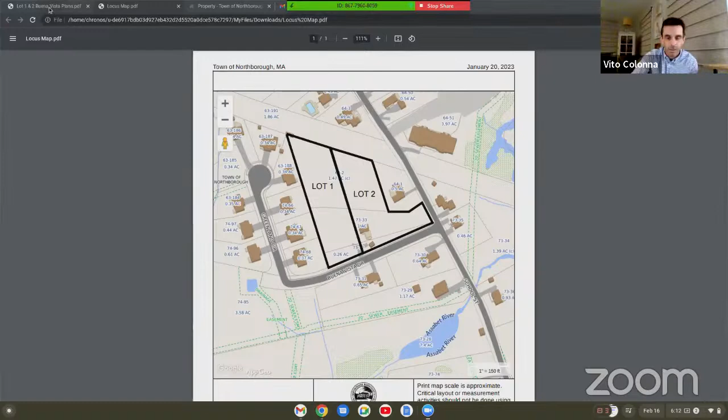Switch over to the site plan. So this is rotated from the last view just so we could fit it on one sheet. But essentially, like I said, it's about a 2.7 acre parcel. Just the front part is developed with that existing house.

We also have wetlands down here right along Buena Vista, right here on this side. And there's also a wetland across the street down in here. Those are delineated by Goddard Consulting last year, last fall. And we located those by survey. So those are both regulated wetlands. This one over here eventually drains into the street drainage system.

There's a culvert right here. So this wetland eventually goes into the street drainage system, across the road into a drainage ditch, and then it goes under School Street and eventually makes its way after a while down to the Assabet River. So both of these are BVWs. The 100-foot buffer zone extends up here and over in here.

The existing site, so just as far as regulatory, I forgot to go over that, regulatory requirements. So each lot, the disturbance is less than 1 acre, but combined, since it's one developer, so it's one common land, the total disturbance was over 1 acre. So that's what triggered the land disturbance permit. If looked at individually, the land disturbance permit wouldn't be required. Combined, they are over that acre.

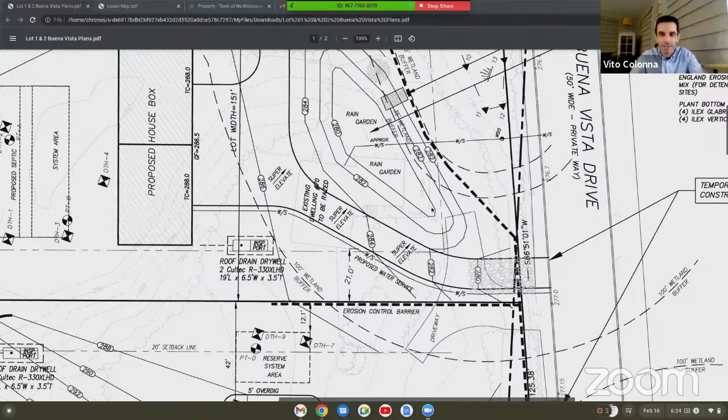So the existing limit of clearing right now kind of runs right through here, kind of right up, follow my cursor. It's tough to see the tree line on this plan, but it's right through there.

Any other questions?

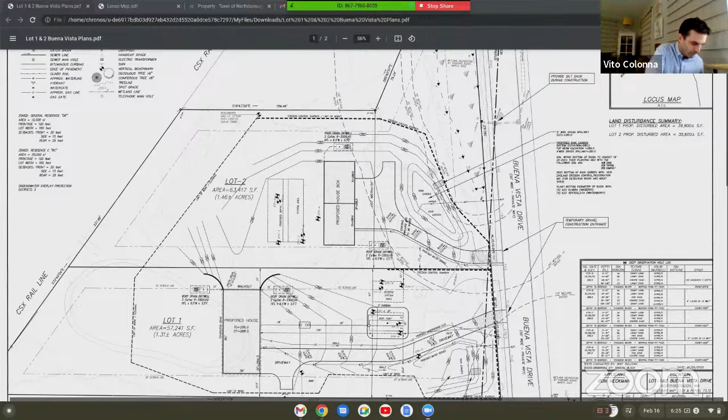Vinny, we were out there walking - I'm not Vinny, Vito - yep. The limit of work here for lot 1 on the southern side, the property line, is there a ridge, is it along the ridge, the property line, or where is that exactly? Yeah, the ridge is essentially where the property line is, it kind of coincides with that limit of clearing. Right now the tree line runs right here, then comes out a little bit, but it generally runs the property line, is where that limit is, the tree line.

Let's see, if there's no other questions from the commission, let me see what we have here in public. We have a bunch of folks here. Anybody, if you want to speak, please get your hand up through the Zoom pieces.

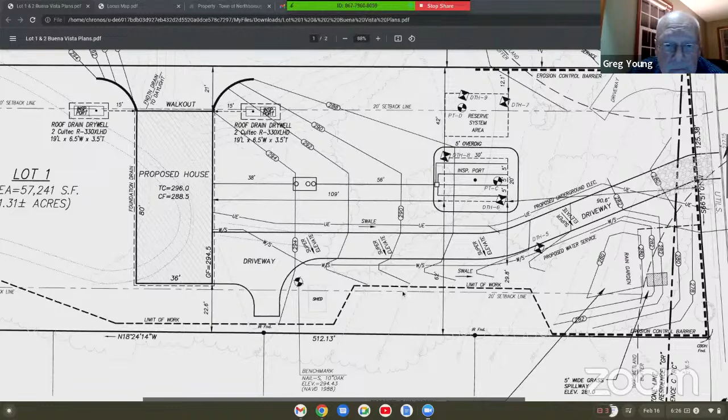Okay, I see a hand up. Marie Ann, hope I pronounced it correctly, Faisler. I will bring you in as a panelist.

Yes, there you are, you're muted. Hi, how do you pronounce your last name? Feisler, okay. I didn't do it too badly. I didn't want to be the first one, I was hoping somebody else would talk first.

So we live at 26 Greenland Circle, which is at the end. Everybody is looking at the lot line, the limit of work line, and the tree line. There was a concern of one homeowner having his tree cut because the limit of work was outside the tree line on this plan.

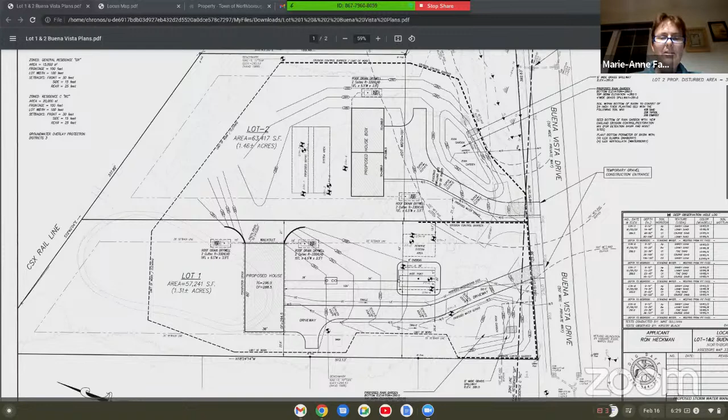Are you referring to one of the notes I read, from Tom Estelle? He has like 5 trees specifically he was hoping to keep. Is that who you're referring to? Yeah, I was referring just in general, because that seems to be a discrepancy between the reality of where the lot line is on the ground and the map. I think other people may wonder, are there other discrepancies?

Vito, this has been surveyed, I presume, right? Yeah, we surveyed this, and it was actually very well documented, this subdivision, when it was built, the records are really good, and we found monuments all over the place. So we're very confident in the lines that are shown. We found monuments right along this rear line, right along the rail line, all along the street, and they all match up with all the deeds and plans of record. So the lot lines shown, we're extremely confident where they are.

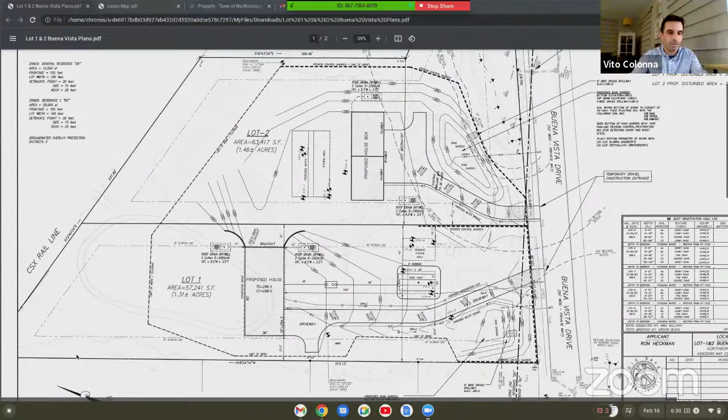So then those trees will be cut? I'm just not sure exactly which trees are being referred to. There are some spots where some of the abutters, like in this lot corner down here, cleared over the first lot in the corner - if you can enlarge it, down in this one. No, the left, the right, no, the other, towards Buena Vista, right, this one down.

Whoops, sorry, that's not where the wetlands are. Okay, this one right here. Yeah, if you can enlarge that.

Yeah, so the property line here basically coincides with that tree line right now. But if you go towards the corner - I can't point with my cursor - if you take a turn there by the corner, you see that tree line is clearly inside. Yep, up in here. Yeah, so that's on the applicant's property.

Yes, so the homeowner was told his tree will be okay. Okay, well, I'm not sure which tree, but to help them out, there's a concrete bound - what does it look like, 15 feet off the pavement? Your pointer's right at it. That's a concrete bound that should be visible, and that marks the corner.

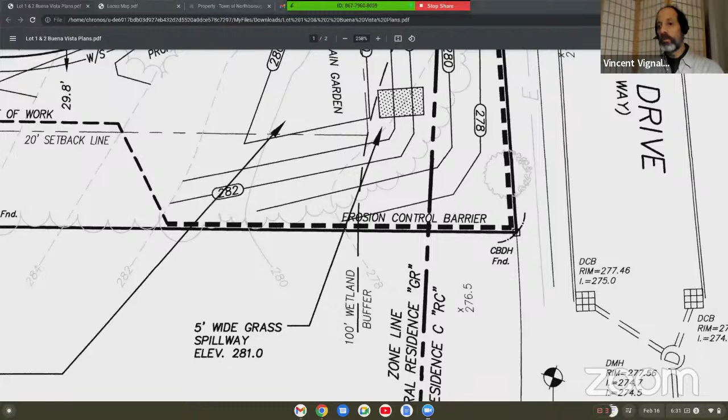So if the homeowner goes out and looks at that concrete bound, it's pretty much perpendicular to Buena Vista Drive - that's the property line right off that bound. So there's a marker out there, and then you can confirm whether the tree is in or out.

It looks like the tree line is inside. Yeah, and the tree line may be off by a few feet, but if you actually go out there and look, you'll know yes or no.

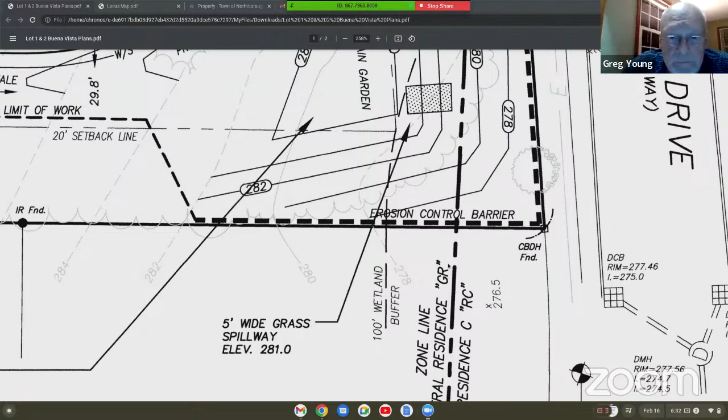But it looks to me like everything above - and I think that's to the north, assuming, oh no, I guess that's east - on the upper portion of this picture, everything up there is going to be cut. So if it's on the proponent's property, on the lot 1 property, the tree is going to be cut.

And there were some other trees down in this location that we didn't locate because they were off site. But there are other trees that are on the abutter's property also down in here. They weren't part of the tree line, they were freestanding, so they're not part of that, but there are other trees down in here.

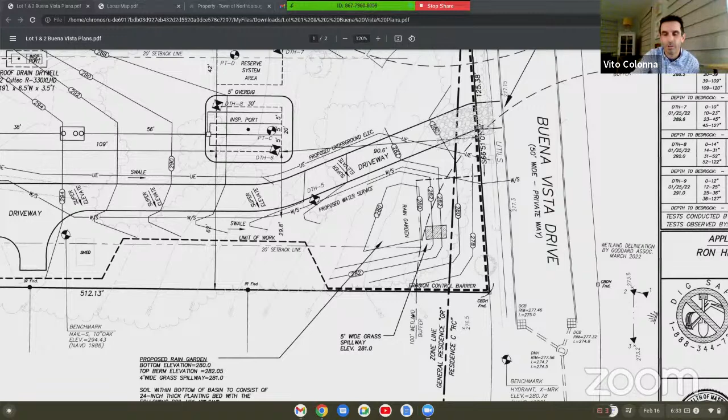Rather than trying to go back and forth talking, we can just locate them and show them on the plan, or just show that we can protect them. But when we get to it, before any trees are cut, I would ribbon them all, and then anyone that wants to take a look and say, oh my God, I can't live with that tree being cut, then we can address that at that point.

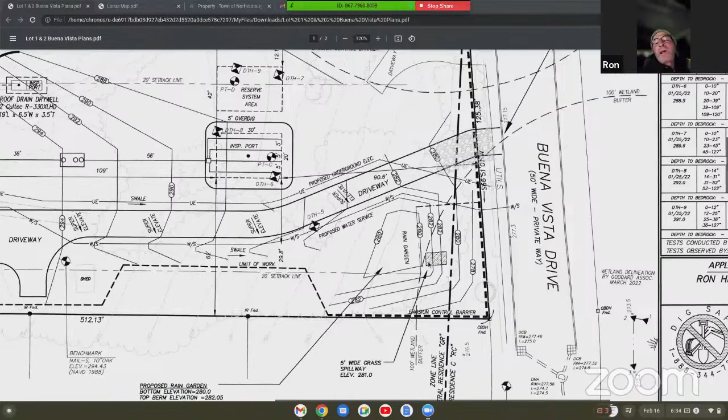But believe me, I want to leave trees as much, if not more, than anyone else here, because I love trees, period, end of story. My intention is to disturb the land as little as possible. I'm gonna live there. I want as much buffer from everyone else, and I want everybody to be buffered from me. And I'm just gonna do the right thing.

Whatever it takes. Ron, that was one of the questions I was going to ask next. You kind of answered it, which is great. And that was, is it possible to leave a reasonable barrier along that ridge separating lot 1 from those homes? It sounds like the answer there is yes.

Absolutely, except for right where we have to excavate for the foundation, okay? That area right there, any trees that are on our property are gonna have to go. But whatever, I'm gonna replace them. It'll be smaller trees, but I'm gonna create some type of a vegetated buffer zone right there.

You can see where the house is gonna go, that end of the house, okay? Because it's so tight to the lot line, we'll probably have to take most of the trees there just to get the foundation in. But we're gonna replace them with some type of a vegetated buffer zone, which to me will probably be as attractive, if not more attractive, than what's there right now.

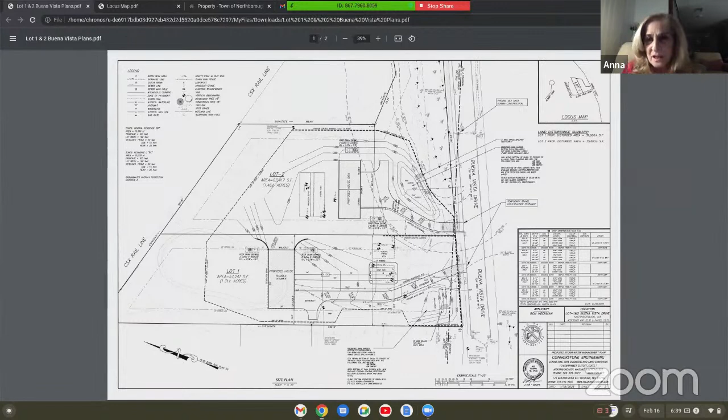I'm presuming that those questions and concerns have been seen by the other members. Yes, he sent those out to all of us during the package for today. Okay, great. So I have a couple of additional questions.

Now, we have been talking about those trees and stuff. Is there any chance that Ron or somebody could maybe make an arrangement with the 3 or 4 houses along there and give us an idea of where it actually will be on our specific property? Like, I'd like to visualize where it is, I'm at 10 Greenland Circle.

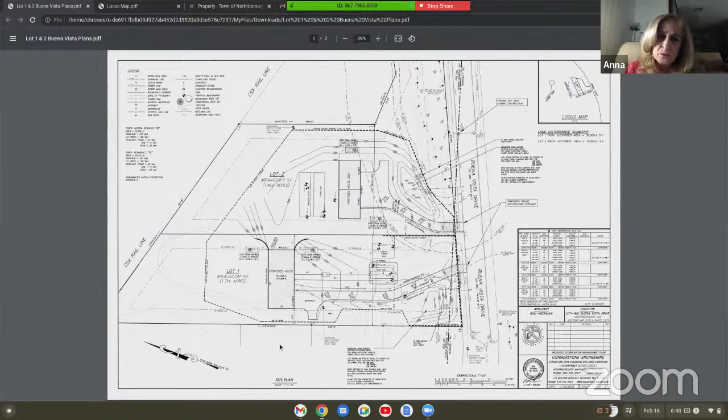Right there, yeah. And also, do you notice that exactly where 10 is separated from 14 and 16, the driveway abuts a little bit further, closer into our property? What's the reason for that? It's just a turnout, so when you pull out of the garage and back out, you can turn around to get out. Oh, okay, okay.

Again, my biggest concern, and it sounds like everyone has taken that into consideration, is the fact that we're all much lower than the proposed home. It seems like you've done a lot of work deciding where the water will be. So my biggest concern is water runoff and the water table in our area, because on Buena Vista Drive, even on a dry day, there's always a puddle of water. So I'm concerned about that coming into our driveways and homes. I know you talked about it, but I'm a layperson and don't understand — has that been taken into consideration so we don't need to be concerned?

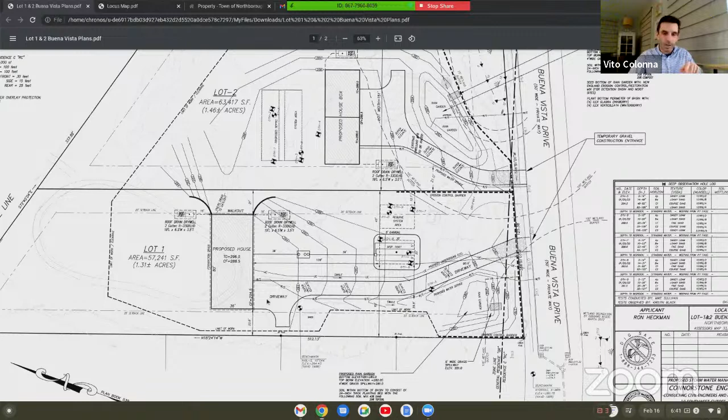Right, so the intent would be to have everything grade or drain away from these properties, all of them down here, especially the ones up by the house. We wouldn't grade this in a way that would direct any runoff towards these houses down here.

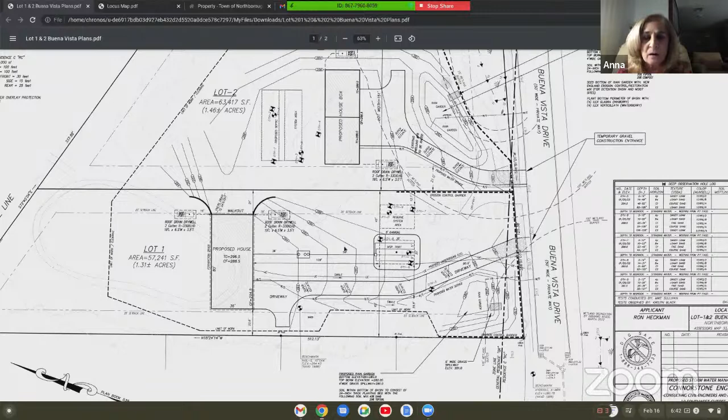And is there any reason that, to get anything to the proposed house, anything would need to go through our land? Gas lines or utilities of some sort going through our land? No, everything — all the utilities are available out on the frontage down in Buena Vista. So nothing would impact or cross any of the property lines. Water and electricity are both out in the street.

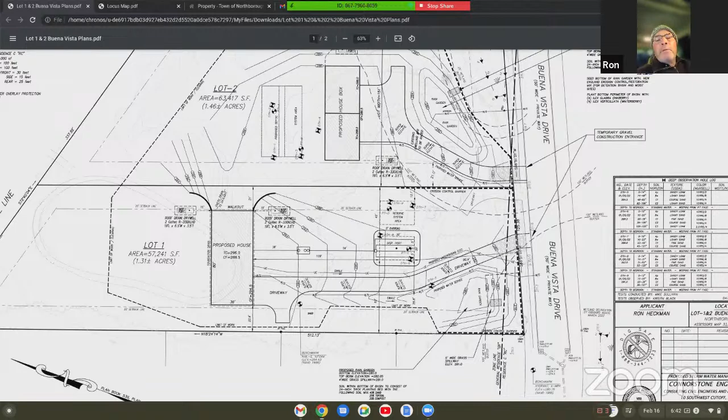Okay, thank you. I don't know if you were on earlier, but Mr. Heckman did say he was willing to flag some of the trees along that property edge once we get further along, to get an idea of what's going to stay. Oh, that'd be great, thank you. Yes, we'll flag all the trees before, and then I can talk to any of the abutters. Like I said, I'm going to do the best I can to save as many trees as possible — I'd rather not cut any trees if I can.

You all set? Yes, all set. Thank you. Any other hands up? I don't see any more hands. One more look here. No more hands. Okay, we can double check before we're done.

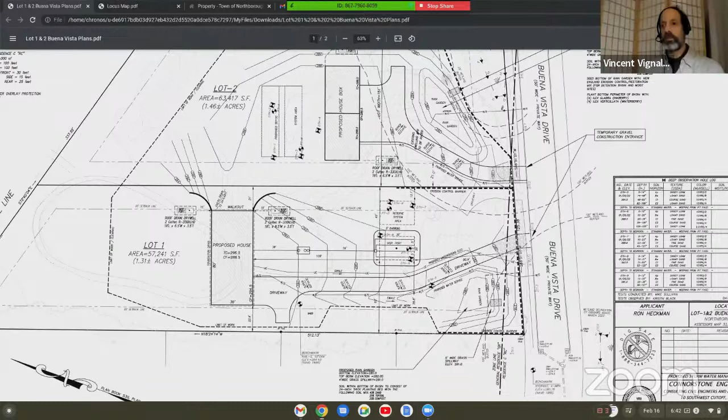Okay Vinny, any questions you have? I know you're working with Vito — would you say he's answered half of your questions or less than half, more than half? Well, right now he's putting together plans to address all of them, so I'm just waiting to see what the plans show. Nothing's insurmountable, I think it's just a matter of tweaking it and making it work for the priorities in the land disturbance permit.

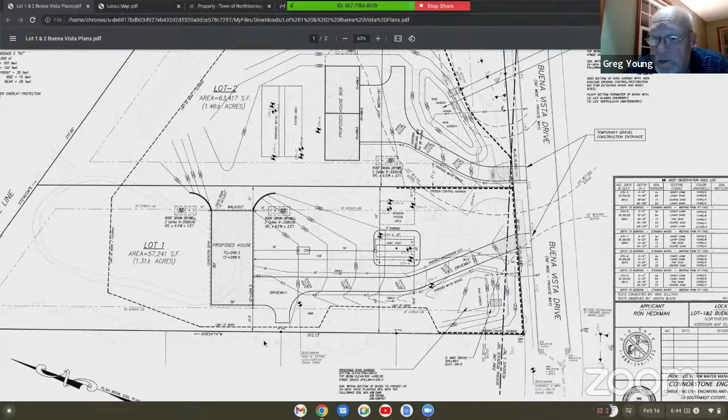Mr. Heckman certainly seems willing to minimize any disturbances and try to provide some support for the abutters, which is good to hear. Any more commission questions? Oh, I've got a hand up — no more, Todd saying no. Dan, you're good. Nope, also Tom Beals, good. Okay, let me bring Mr. Gleason in here — promote to panelist. Brian Gleason will be joining us.

Any minute now. Mr. Gleason, you with us? No. His name is coming up, but he's muted. There he is. Can you hear me now?

We can hear you, Mr. Gleason. Yes, sir. Okay, first of all, I just want to thank you for hearing our concerns. I'm at 22 Greenland Circle, which is next to Marianne. I bought my home in 1999, so I've been there a long time. And I like my privacy. So I'm concerned with the barrier. I want to make sure I don't have to look up from my backyard and see little kids on the swing set on the home across the way there.

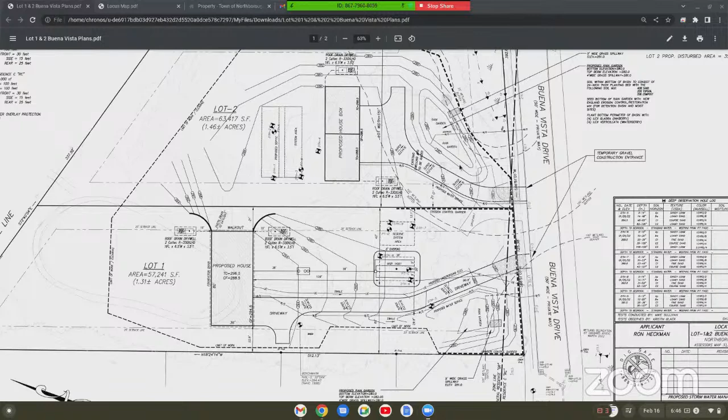So whatever you guys can do to provide some additional privacy, that would be great. And hoping maybe somebody can come out and walk with us along that barrier and just show us, because we're not quite sure. I have chairs out there, and I sit at the top of the hill, and I don't know if the hill's going to go away. So I'm just curious, but again, I just want to thank you guys. Do you have a timeline as to when this will be, when you'll start working on this, and when it will be completed?

It all depends on permitting. It could be, it's possible, if everything goes smoothly, maybe this summer I could start to put a foundation in. But you can call me, I'll come out and walk that with you anytime you'd like.

I'm 5 minutes from your house. I live in Northborough. Do you need my cell phone number? I could give it to you right now. You got a pencil? Sure. Yep, it's 508-962-1385... 508-962-1385.

And I think what I'd like to know is kind of have a walkthrough, because as you can understand from our concerns, we're not quite sure where our land ends and where it's going to start. Actually, I don't think any trees are going to be disturbed behind your house, but we can walk there. The only thing I might do is cut some dead trees down behind your house and maybe limb up some of the pines behind there 8 to 9 feet, so the dead stuff is cleaned up a little bit. But I can walk through it anytime you'd like.

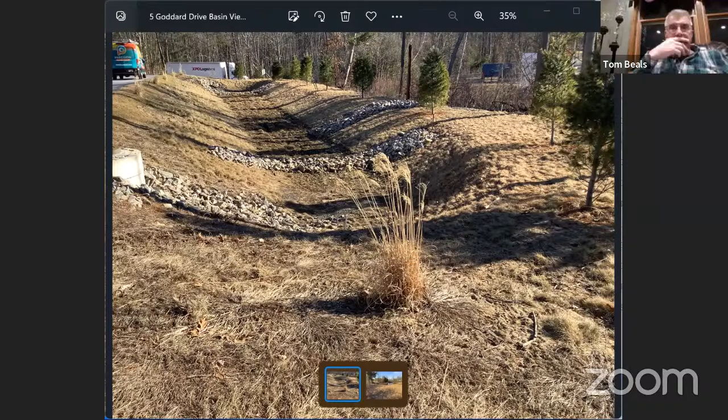Yeah, good. Okay, so we're good with all 4 then, Vinny, huh? I am, yes. Okay, we need a complicated motion here if we want to do all at once.

I would move to issue certificates of compliance for 43 Hudson Street, 86 Lawrence Street, Goddard Road, and 5 Goddard Drive. Second, second by Tom Beals. Roll call: Todd Helwig, yes. Dan Clark, yes. Tom Beals, yes. And I vote yes.

All right, good. Let's see, what else do we have here? What about the violation on Sunset Drive, Mr. Kane? Hopefully we can get this off the agenda going forward. Yes, we can—that's why I just wanted to report.

He had a pile of a lot of years' worth of accumulated trash and things that were in the wetlands and in the buffer zone on his property. He hired a landscaper company and a cleanup company to come in and pull it all up the slope—it's like a 30-foot high slope. At the last meeting I showed a picture of a pile sitting there, and now that pile is gone. So the area's been cleaned up and it's resolved.

Good. Your notes, Vinny, said there's still a couple of pieces of garbage, like concrete and a propane tank, down in the wetland. It was a footing, a concrete footing for an old clothesline—probably 15 to 18 inches in diameter, 18 inches deep, concrete with rocks and stuff. It's a couple hundred pounds, and I don't see any reason why it's going to cause any environmental damage down there. I didn't push to have him carry it up the hill.

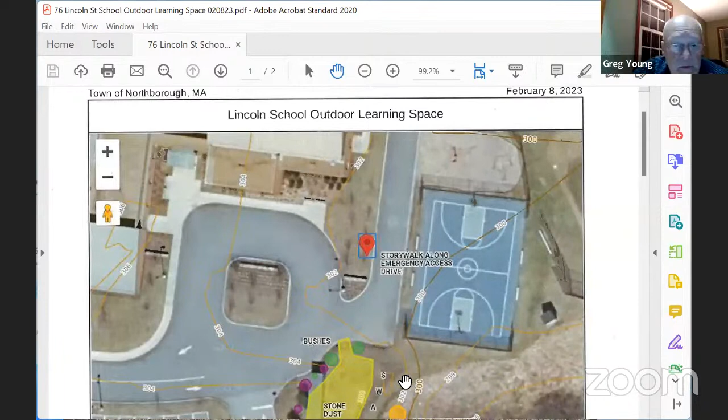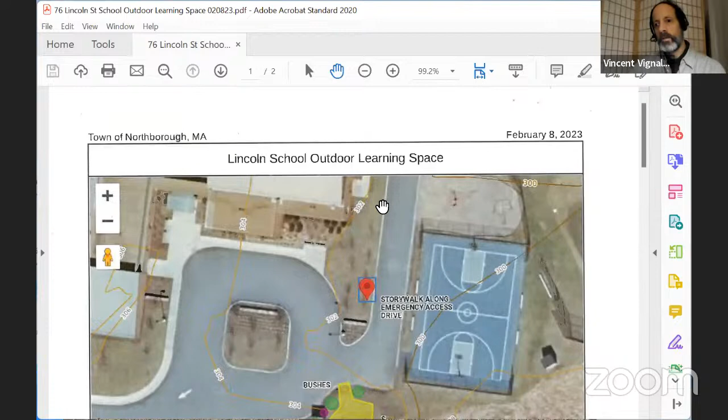Read down a bit, Vinny, show us some more. Yep. So the story walk itself is going to come out the back of the building up here and go around and down the edge, along an emergency driveway. So there's not going to be kids in the street, it's just an emergency access. It's a good spot for handicap accessibility, we don't have to worry about paving it, it's already paved and accessible. So they're going to have the posts on stands along that curb.

And then there's also this learning space associated with it. Right now it's just a field, a grassed area, and it goes down into a water quality swale for the stormwater basin that was built and rebuilt a couple of times a few years ago. It's just a stone dust area with a buffer of new vegetation on one side so that when cars come down here, they retain a bit of privacy in this outdoor learning center. It's a view out, and the wetland is actually down in this area here, so it's got a lot of birds. I guess there was a scout project in town that did some bird identification and bird information in this area.

So they're going to try to piggyback on that and just make it an open outdoor space. They're proposing to put in a couple of deciduous trees so they get a little shade when it gets warmer someday. But it's a simple design, just a place where a teacher can take the kids outside in nice weather, or the counselor can take kids out along the story walk or to this space for an easier place to discuss things instead of an official room.

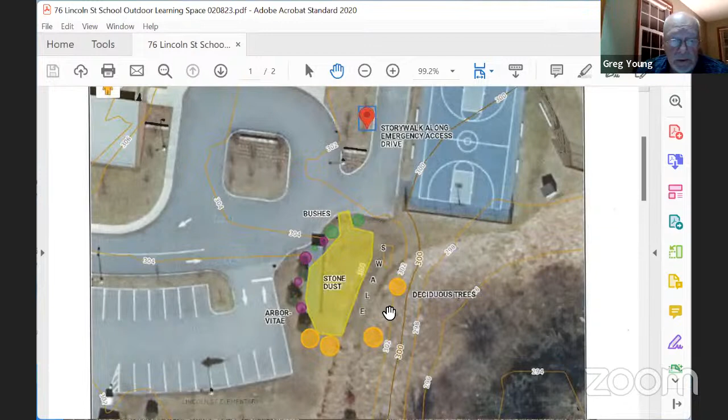Super, nice, super, good job. Thanks, Vinny. You're welcome. All right, anything else, Vinny, on your side, we got it covered? No, I think you're covering it all, you're reminding me of everything I'm forgetting. It's awesome. I think we're good.